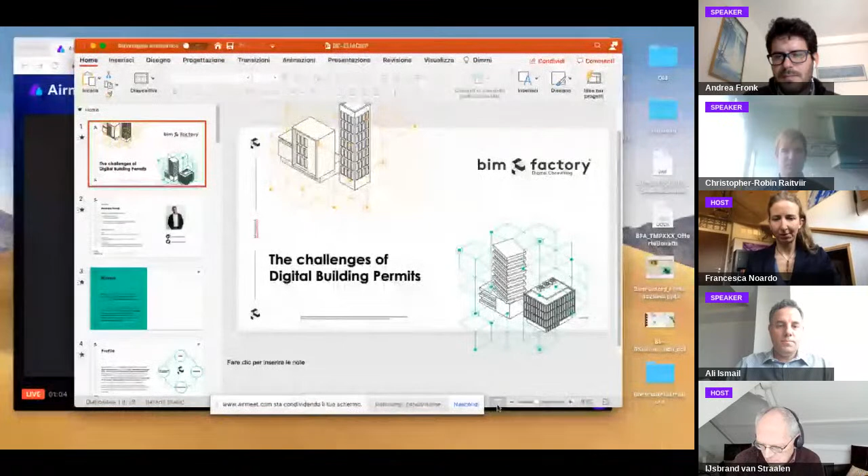It's a pleasure for me to be here because I think that when we talk about digitization, many times we are focusing on BIM, on digital twin, but I think that at the moment we need also to speak about traditional activities and traditional tasks that are daily activities for designers and municipalities.

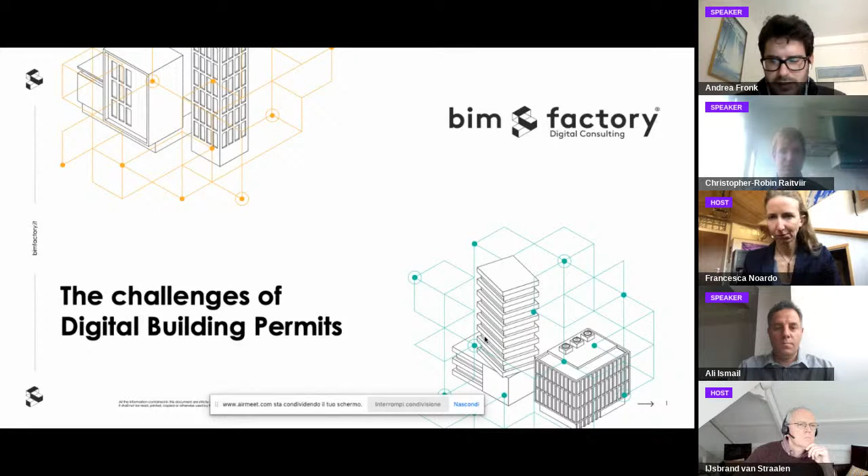So shortly, I'm going to present myself. An engineer, and I'm the director of Bim Factory. I worked in 2014 at Fraunhofer Institute in the post-construction engineering research team with an application of lean construction and last planner system. Then, since 2015 to 2019, I worked as a BIM coordinator and then partner for Division Architecture, which is a design firm located in Brescia in Italy. And then, since last year, I worked as a director for Bim Factory.

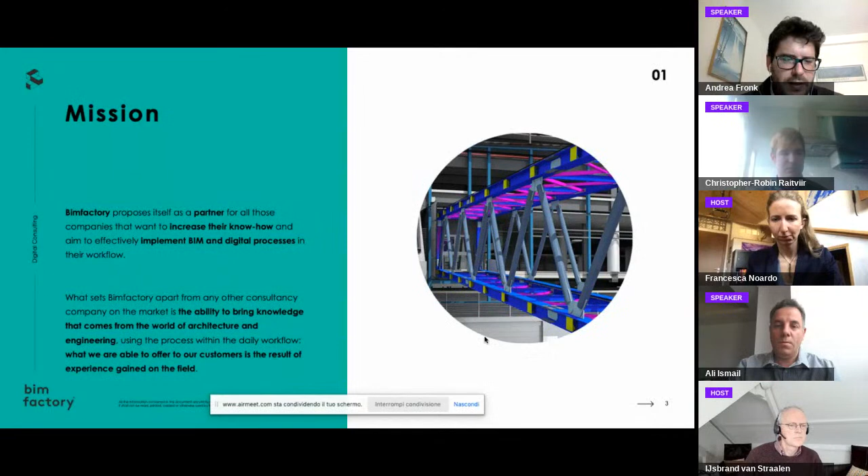If you want to follow me, I'll leave my social network links. Who is Bim Factory? It's a consultancy firm working on the implementation of digitization in the construction sector. We are all technicians, we are architects, engineers, and we had the opportunity in the last 5-10 years to implement BIM and digitization in many projects, and we had the opportunity to have feedback by many stakeholders in the supply chain, and so we decided to offer to our customers the result of our experience gained on the field.

Our target is to support every kind of stakeholders involved in the supply chain. Clients, for example, many times are investors, but also public administrations. We support designers. We have a lot of experiences with constructors, both general constructors of traditional companies, and of course asset and facility managers, which many times are working together with the clients.

Shortly the history, Bim Factory was founded in 2015 as an operative brand on Division Architecture, but since 2019, thanks to the participation of Progetto CMR, another design firm located in Milan, Bim Factory has become a consultancy company with international scope.

Now, let's talk about the agenda of this speech. We start with the state of art, particularly in Italy. Then I will talk about the critical topics about building permits. One of the most important topics, which is documentation versus model. And last but not least, the validation of data.

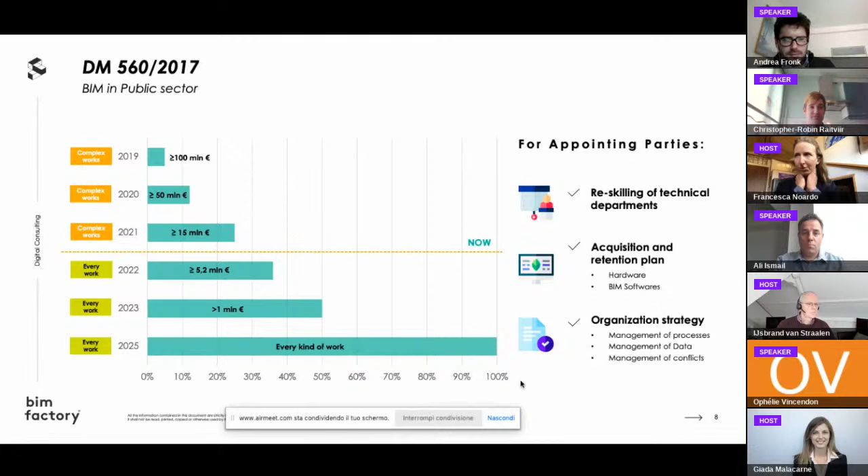Other important aspects about the implementation of digitization are related to the reskilling of technical departments, of course, the acquisition and retention plan for hardware and BIM software, and the organization strategy about management of processes, data, and conflicts.

Of course, we have also technical rules. We have the ISO 19650 about the vision of the strategy about BIM, but we have to say that Italy was one of the first countries having the national annex of ISO, which is UNI 11337. And they are related on different levels because the UNI is focused on the technical parts of digitization, for example, guidelines for employer information requirements, level of development for the national requirements, and so on.

And of course, we have an ecosystem of rules in Italy, comprehending the ISO for IFC standard, for information delivery manual, and structure for classification. So we can say that Italy has all the tools to apply BIM and digitization in these workflows, and maybe in the next year we will reach very important results.

Now I'm going to show you some numbers reached by source ANCI, National Association of Italian Municipalities. The interesting thing is that near to 50 million people in Italy are living in large municipalities, and only 10 million people are living in small municipalities. It means that most of the population is located in large cities, having of course some kind of goals, budgets, and targets. But the interesting thing is that 70% of municipalities are represented by small municipalities, having less than 5,000 people.

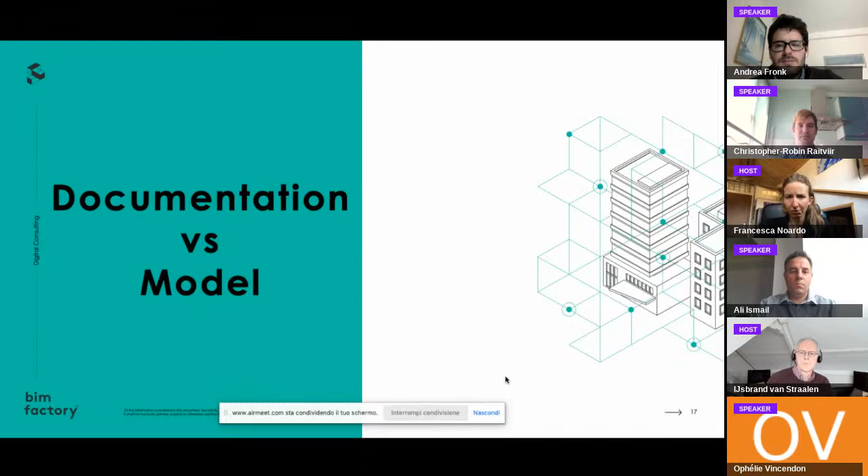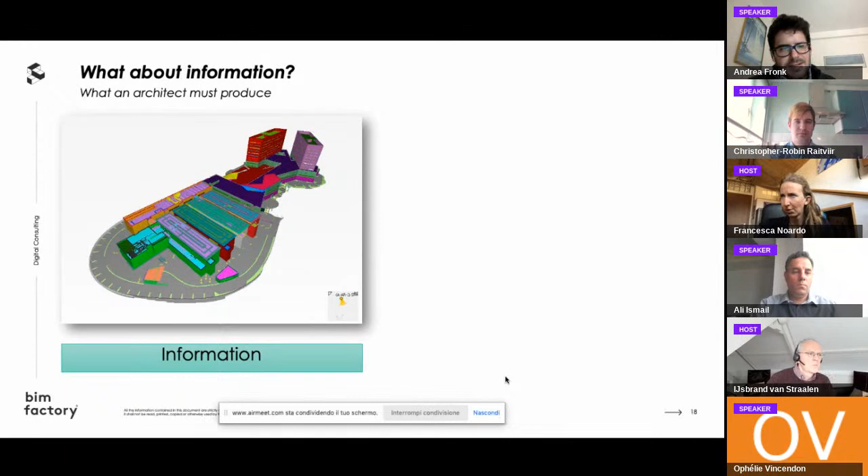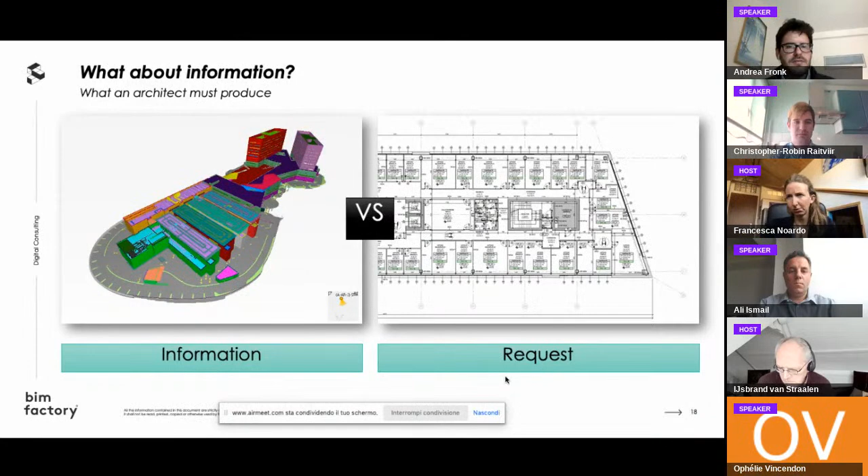Let's talk about documentation versus model. In Italy, digitization is already implemented by technicians. We met a lot of architects and engineers who have implemented BIM in their offices, and they spend a lot of time to create value, because what is a BIM model? It's a 3D geometry model, complete with all information needed for a particular scope or use. But the time and value spent on this work is not continuous with the submission of the building permit, because every time the request is to have 2D documentation. So this chain is blocked in the passage between the designer and the public administration, and many times the designers decide not to develop this kind of information, because they lose a lot of time and money.

As an example, last year we worked on a building permit for the University of Geneva, using a BIM model because it was a complex work over 100 million euros. We had something similar to 5D, a relationship between models and cost estimation. But the municipality wanted 3 printed copies of the cost estimation documents, so we spent a lot of time to print, submit, and control this documentation. We think nobody can be supported to validate a document having close to 1,000 pages. So we spend a lot of time not adding value to this process.

I think BIM models could be very helpful tools to structure data information, particularly for building permits. BIM models can grant the structurization of information for elements. We can introduce attributes and parameters for physical performances of elements, for example transmittance, fire rating, acoustic rating, and so on. But we can also introduce data information for spaces, which are very important and relevant for the building permit because of checks of minimal surfaces, minimal area, distances, and so on. So I think it could be helpful.

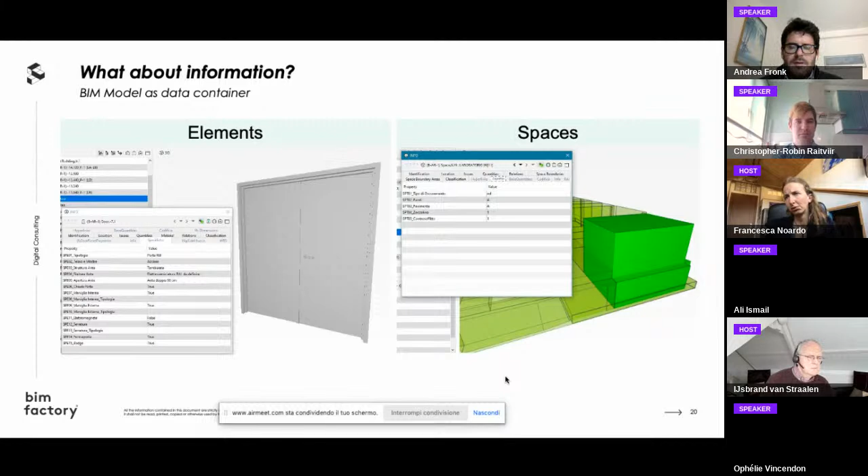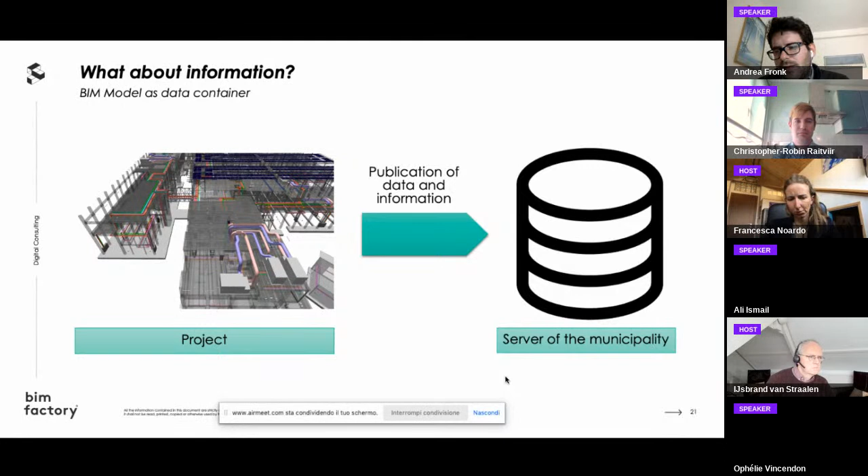Another aspect: if you submit the project, you don't submit only the geometries, but also the structured database of the project, which could be published on a server for the municipality and accessible by technicians who will work on this project in the future. So I think it's very important to optimize this kind of process and to find the return of investment of this activity.

Now let's talk about the validation of data. I think it could be an interesting example of the problem for the designer, that is the demonstration of the project, which is the process for the designer. He has to first find the requirements for the building permits, which can be in different documentation and different codes. He has to analyze the requirements, define the project, then represent the project in 2D and also demonstrate the project.

For example, on the left we can see the demonstration of the areas. Many times the check on the drawings is made physically. So as a designer, you must demonstrate the dimensions, the small areas that compose the larger areas, and so you spend a lot of time on this activity.

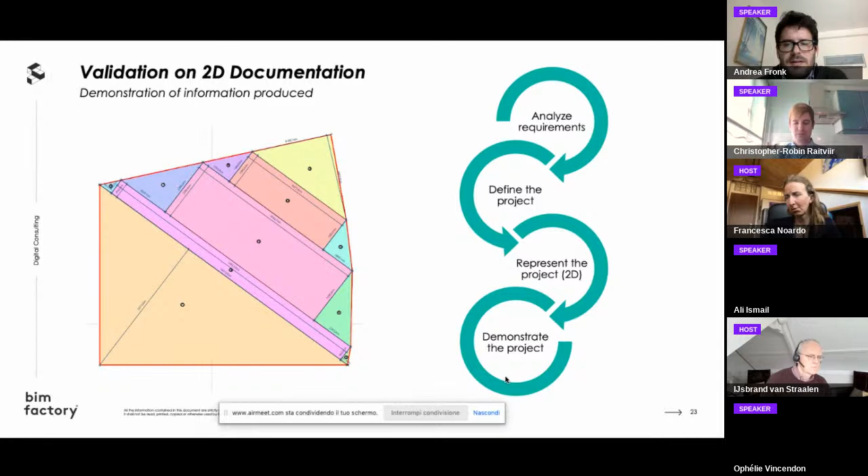Of course, if you have a BIM model, you can query the model. You can click on the objects and get answers about this kind of data—digital queries that can be done for performances, for volumes, and for surfaces. I think it could be an important opportunity to implement also the check of the data.

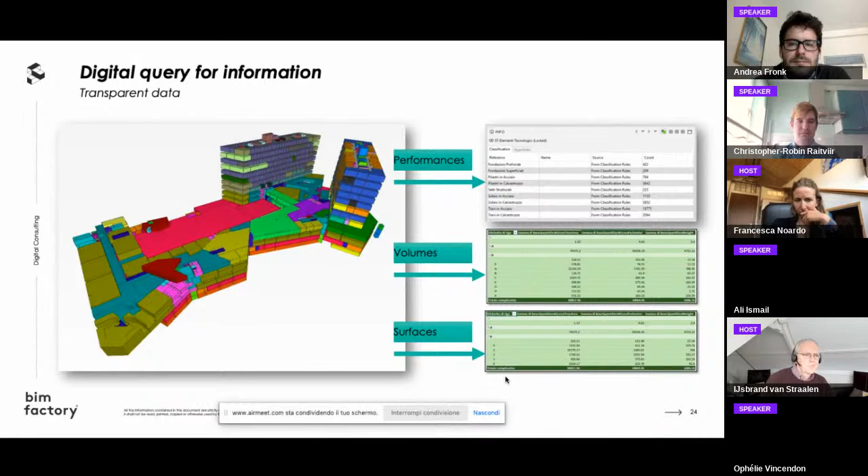Check of the data is composed of different steps: it could be model checking or code checking. When we talk about model checking, maybe it's more interesting for the project, for the designers. But also, in Italy we have a lot of historical buildings, and the public administration is always interested in possible clashes between expansion projects and existing buildings. So it could be helpful to have some rule sets and possibilities to automate this kind of control.

And of course, also code checking. When you validate a building permit, you have to validate data such as surfaces, areas, densities. This kind of information can be validated automatically with BIM tools or in other ways, but surely it could be automated by digital tools.

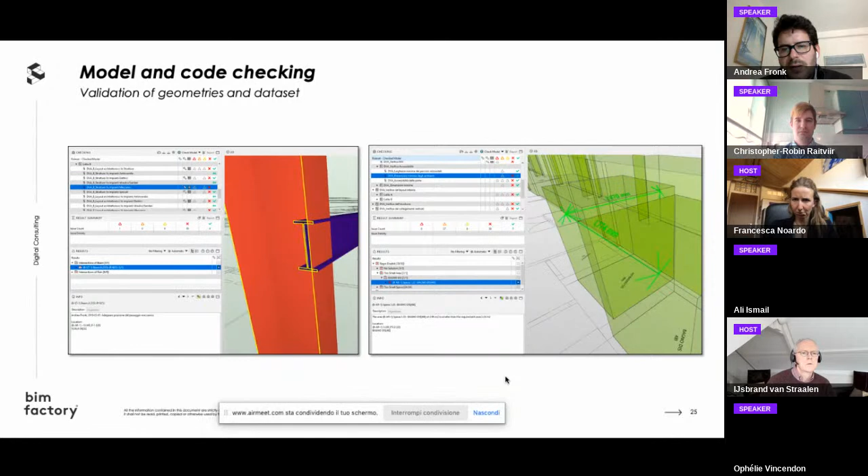To have an automated check, I think it could be very helpful to have also the digitization of information requirements, because many times the information requirements are not quantitative, but qualitative. I think we must have a more computational approach to give the information requirements. It could be very helpful to have rules for automatic calculation of areas, volumes, and surfaces. For the designer, it's very interesting to have a data set for technical codes. In this way, the designers and the public administration can speak the same language, and also have specific data sets for element performances. So if the designer has the information requirements, he can monitor these requirements during the project, and maybe spend less time and less money in the phase of dialogue with the public administration during the submission.

And last but not least, we are talking about public administration, and so we must spend some words about open standards and open formats. At the moment, the most important open standard for digitization in the construction sector is IFC. In Italy, we have to spend a lot of time promoting the culture of open format, because many times public administration is focused on the problem of the tool and not on the problem of the data. And so I think that IFC could be a very helpful tool.

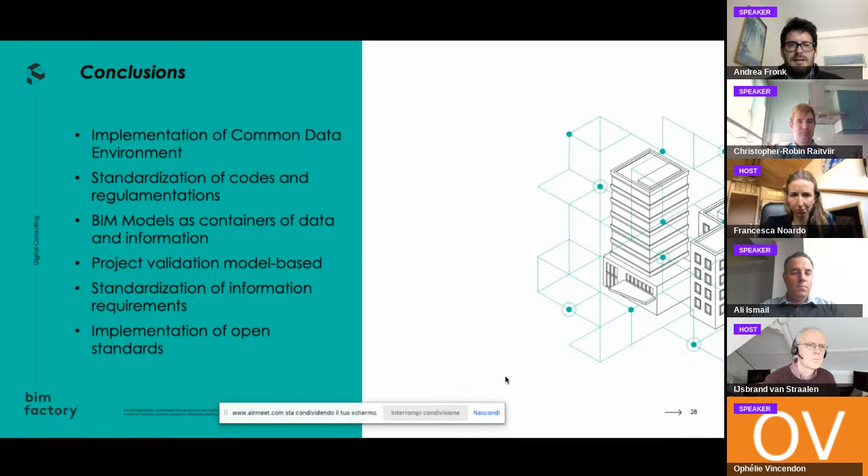For me, that's all, and I'm open for any questions.

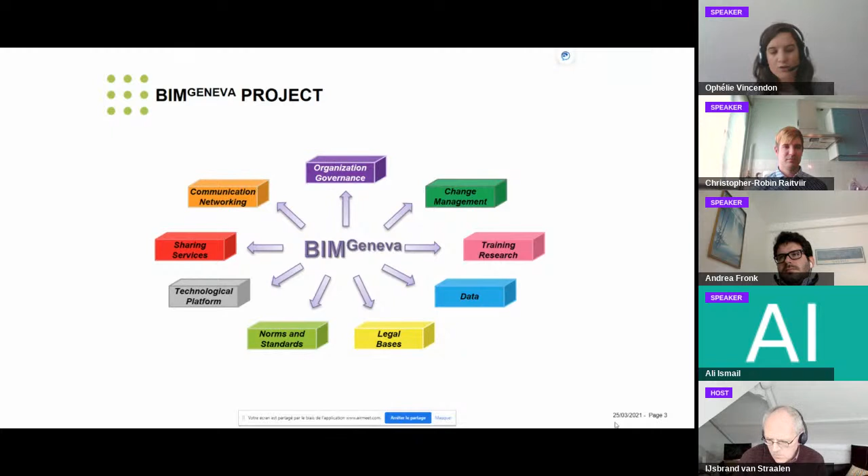So we have two projects inside one. The first is the BIM project, which is to develop BIM inside all the states, not only in the regulation authority, but also in build assets management and territory management. And the other project is to digitalize building permits.

The state of Geneva started two years ago a digital platform, ACDMAT, for digital building permits, and now delivers around 80% of the building permits in a complete digitalization way, based on 2D PDF and online forms. And we started to create a prototype for digital building permits based on a BIM model. So that's what I will present to you now.

The strategy for development of the BIM model building permits started with a reflection about the integration of BIM inside the building permit process. Then we defined all the requirements and all the different modules we needed. We are doing the structuration of the data we need for the BIM model inside the building permit, and we had a reflection about Geneva's regulation and how to translate it into digital rules. So we created a prototype, which I will show you after, and now we are integrating the prototype inside the whole system and inside ACDMAT.

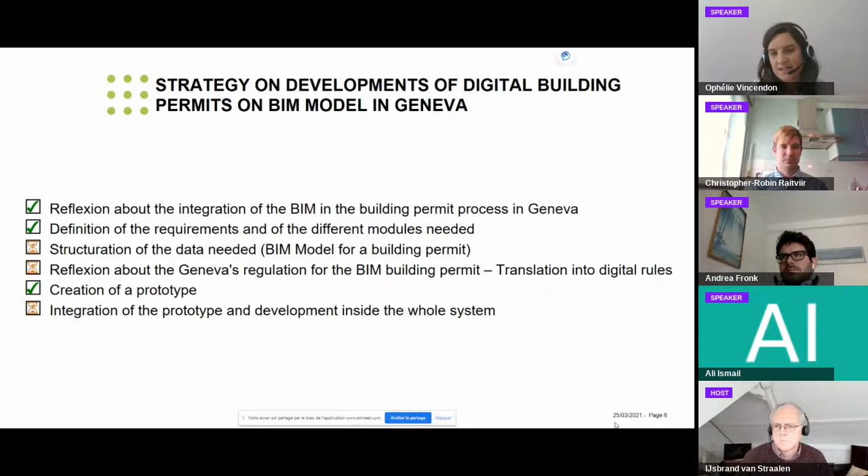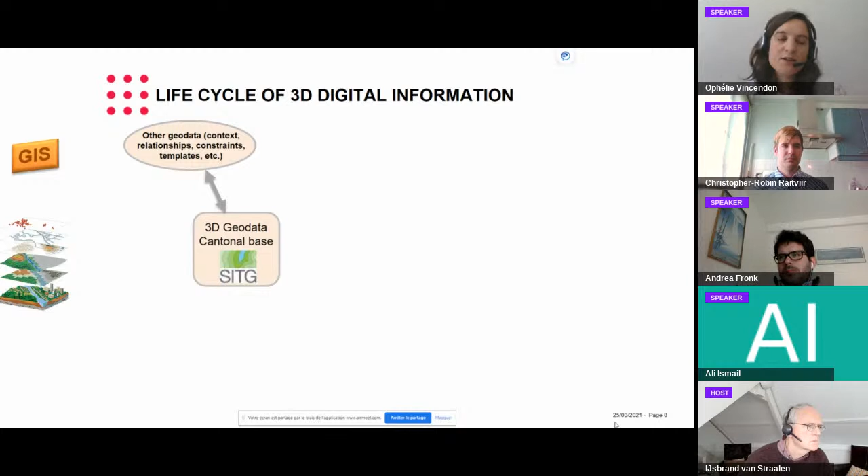We have a view about the life cycle of 3D digital information. We have a really huge geodatabase, the SITG, which is in the GIS way. So the goal is to extract some of this GIS data for the area around the project, and to do it in the BIM way, so we can use all the use cases in BIM, and after the project evolves in the BIM way.

And then we will integrate this data inside the geo database, the SITG, and use all the use cases in the GIS way.

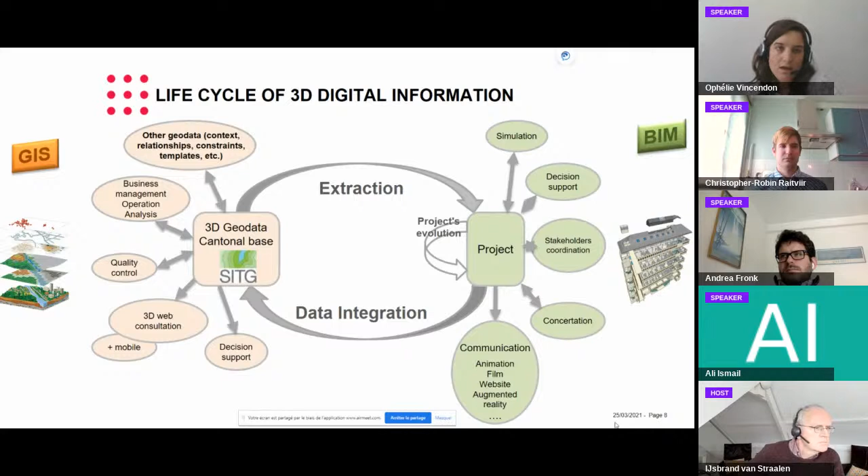I will not really explain all these steps, but that's all the steps for the digital building permits. I will show you for example a case where we concentrated our approach, and I will show which steps it will affect.

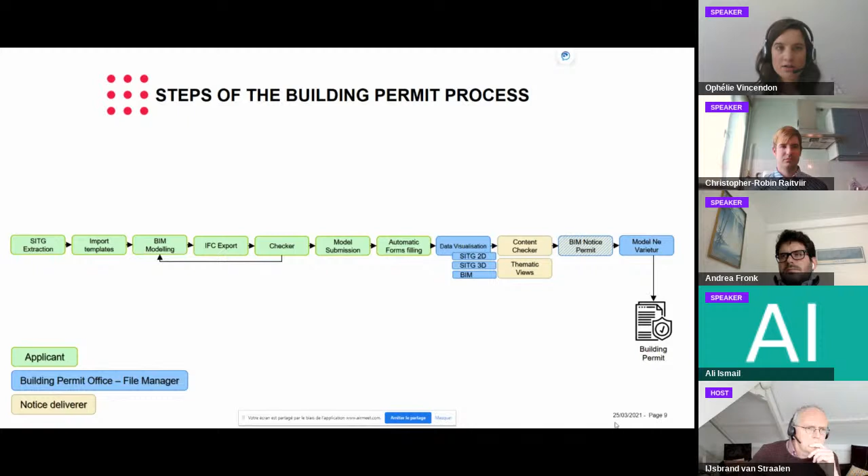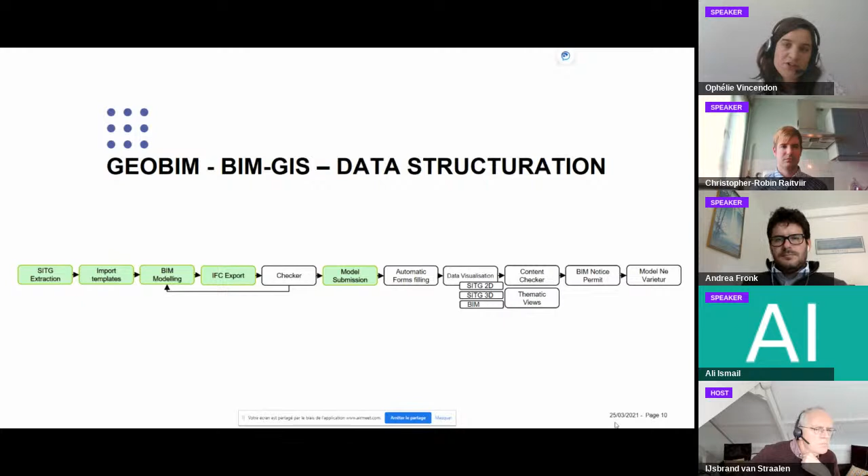So the first is GeoBIM, the conversion of BIM and GIS, and the structuration of the data. We are mapping all the GIS layers with BIM objects and parameters, and creating an IFC export from the GIS data. We are also structuring the BIM submission model, and creating templates and export templates, property templates with MVD, to structure correctly the submission model.

What we encountered is that GIS layers are structured differently than BIM objects, and we have to match layers with objects and layers with parameters, and we have 2D layers inside 3D objects. So it's complicated to see which one has to go in objects or parameters, and to translate all that. We have also problems with georeferencing, because all software are different with georeferencing, so it's really difficult. And also the importation of the IFC model inside modeling software.

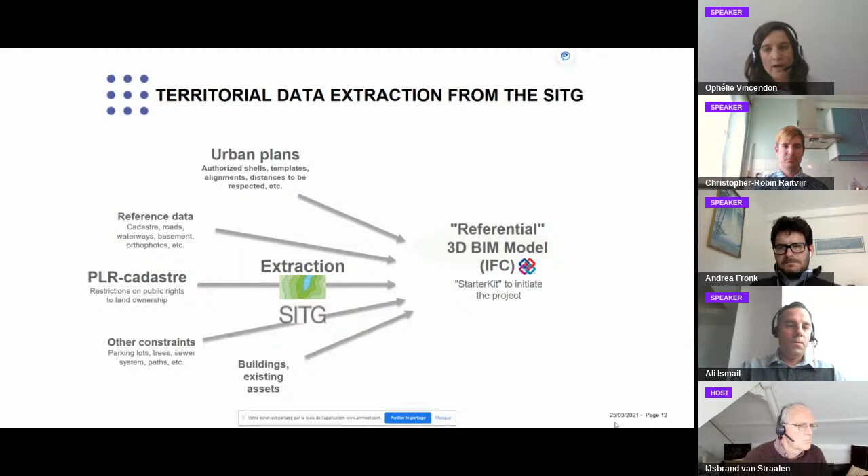So the goal is to extract all the urban plans, all the referential data, cadastral data, and so on, and to create an IFC model with all the referential data. That's what we extract from our database. It's an IFC with the correct structuration, the correct BIM objects with IFC BIM classes, and we have the upper ground and the underground with all the canalization and so on.

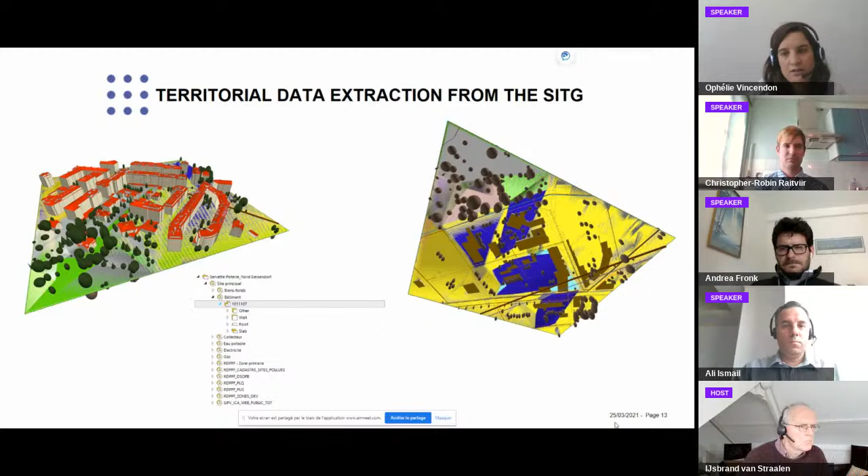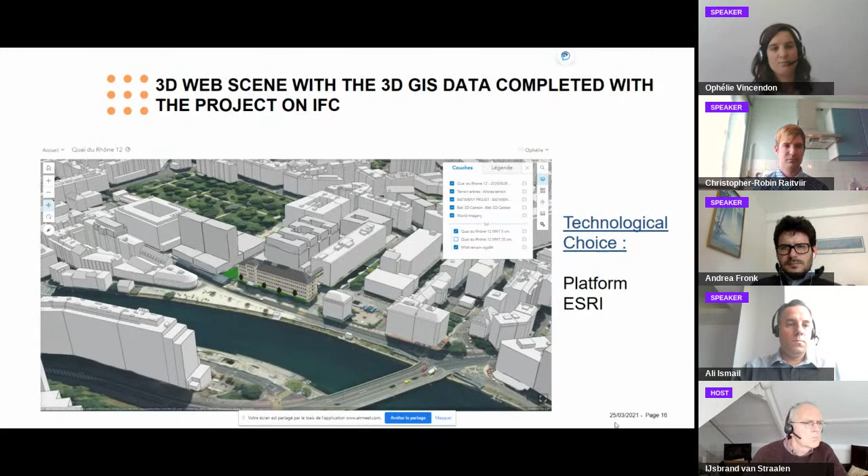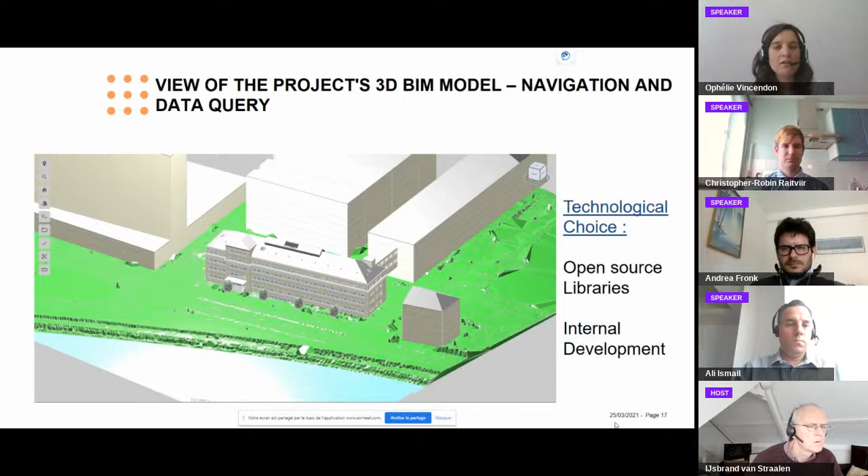What we encountered is also the georeferencing for the 3D GIS website, and problems with territorial objects in IFC. So what we have is the integration of the IFC inside the whole canton. For the SIG we are using ESRI technology, also for the GIS part. For the BIM part, the BIM viewer, we use only open source libraries, and we made our own development.

And so we created some rules to see the project with a professional angle, for all the professionals inside the state. They are seeing some aspects from the model for the building permits. So we were using some thematic views to do that.

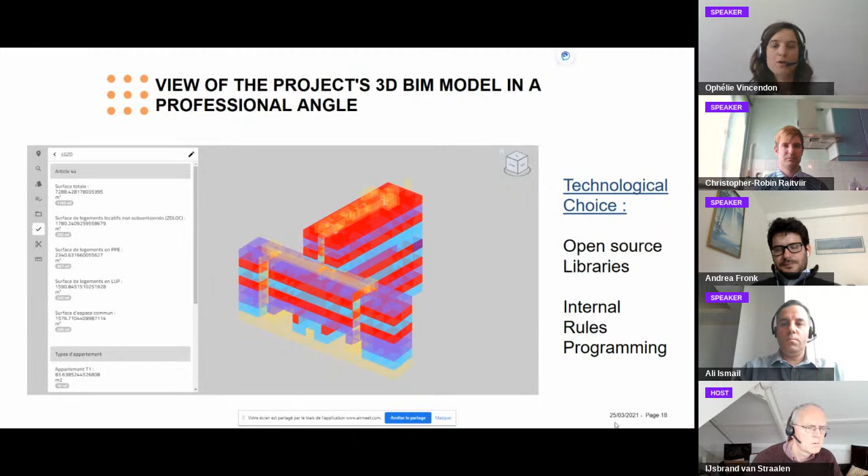The other part is the data checking, so we developed our own checker also. The first step was to identify the regulations which are translatable into programmable rules, also the structuration of the BIM submission model to do that. We are currently implementing some rule sets for the structuration of the data, the completeness and structuration of the BIM submission model, and also for some construction regulations.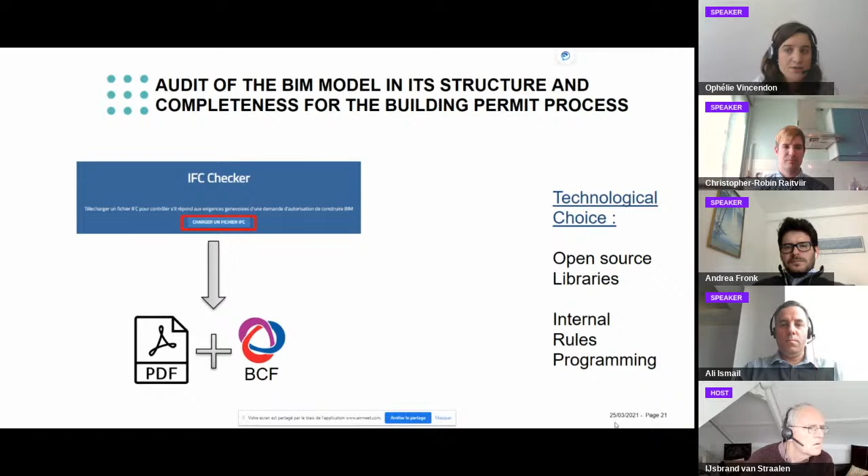The problem is that the regulation is not thought through a 3D model, and we have some difficulties translating it into programmable rules, so we are currently analyzing that. What we want is to have a checker online for testing during the creation of the model, for professionals to test during model creation whether the structuration of the data fits the rules for the digital building permit in Geneva. To do that, we use open source libraries, and we program that in our own way.

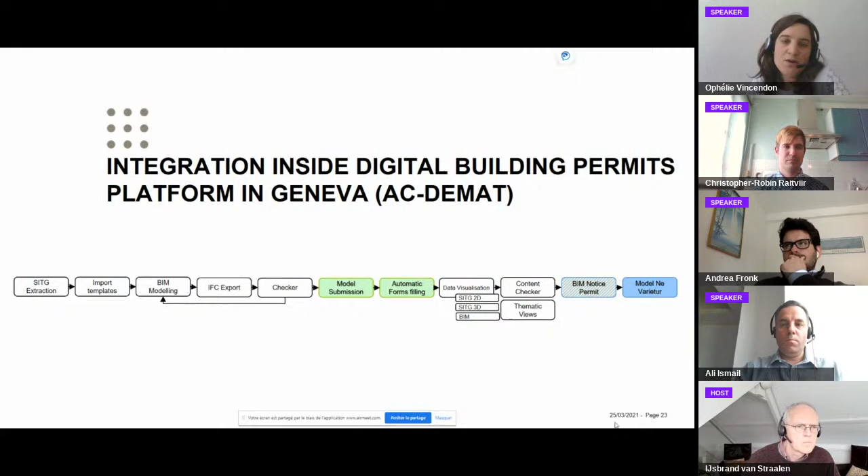We use the RASE methodology to translate the construction rules. The other part is to integrate everything inside the whole system, the building permits platform, AC-DEMAT. So what we are doing is connecting all the modules, the viewer, the checker, and all the other modules, to the platform used to deposit a project. We are also doing the filling of forms automatically for the building permit.

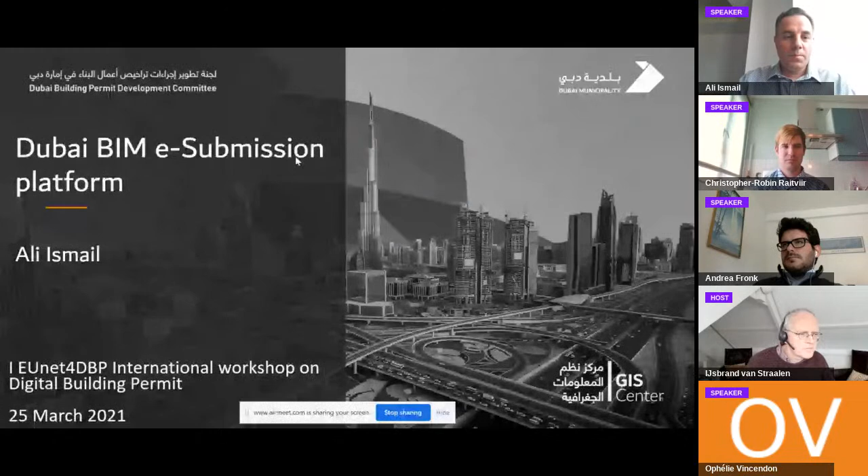First of all, I will give some information about Dubai Municipality and the GIS Center where I work. The Dubai Municipality is one of the largest government institutes in the United Arab Emirates, and it is one of the leading institutes in terms of providing smart projects and smart services. The vision of Dubai Municipality is developing a happy and sustainable city, and over time Dubai Municipality has grown up to 34 departments with more than 125 sections and almost 11,000 employees and workers.

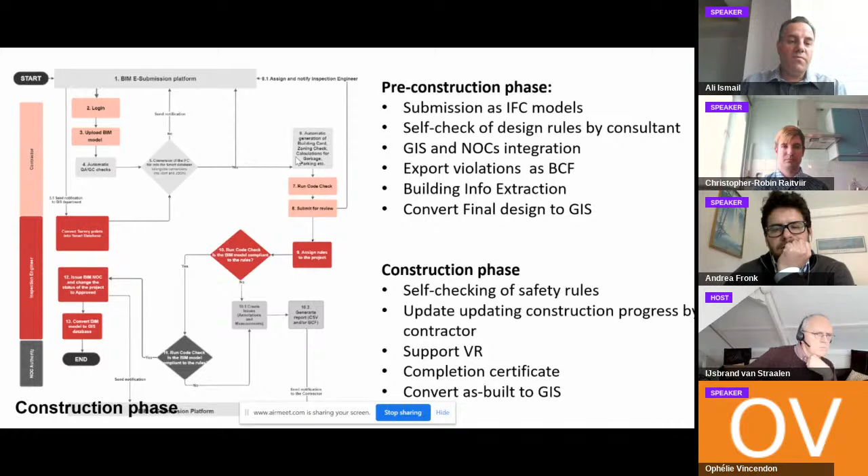If the contractor provides an as-built model, in case there are changes in the design model, we can have the second kind of BIM to GIS integration and convert the as-built model to GIS. So this is briefly a simplified workflow for these two phases.

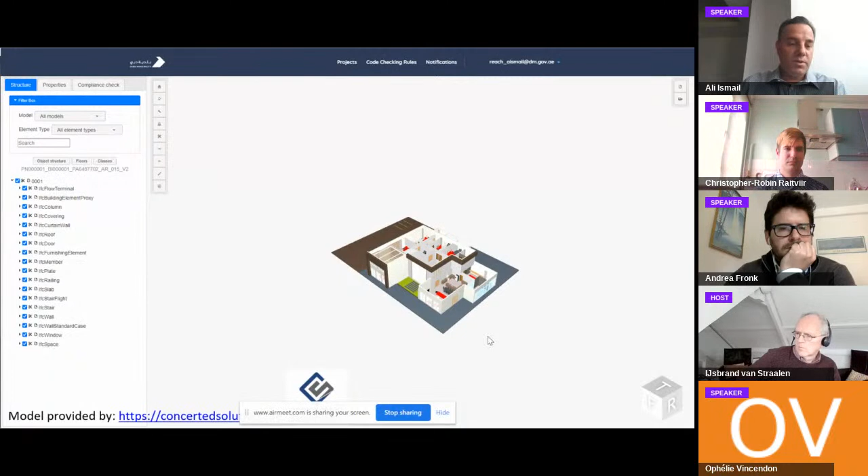This is a standard example of a real villa here in Emirates, provided by Concerted Solutions Company - thanks to them. Here we see, for example, the online viewer with a lot of options for filtering, extracting information, inquiring information, and so on.

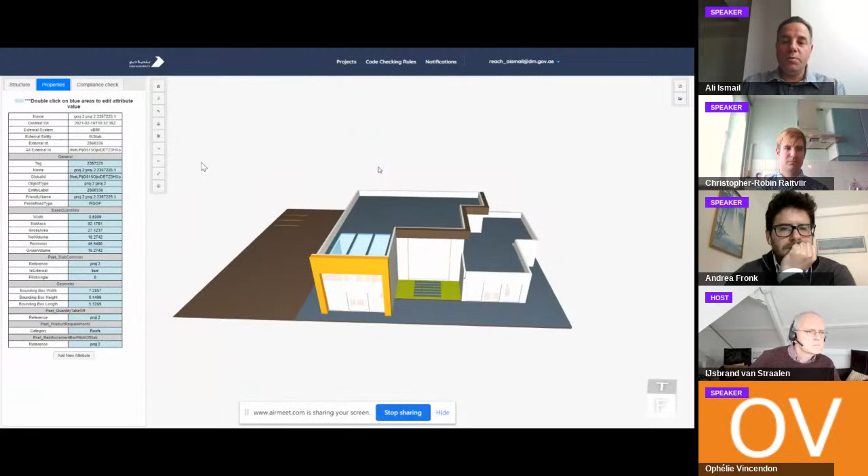As a villa, there is this tab, compliance check, where the user clicks and selects which rules he would like to check. Then he gets automatically a report for the violations or for the elements which satisfy these rules. Here we have an example: checking the maximum allowed height for the riser of a stair.

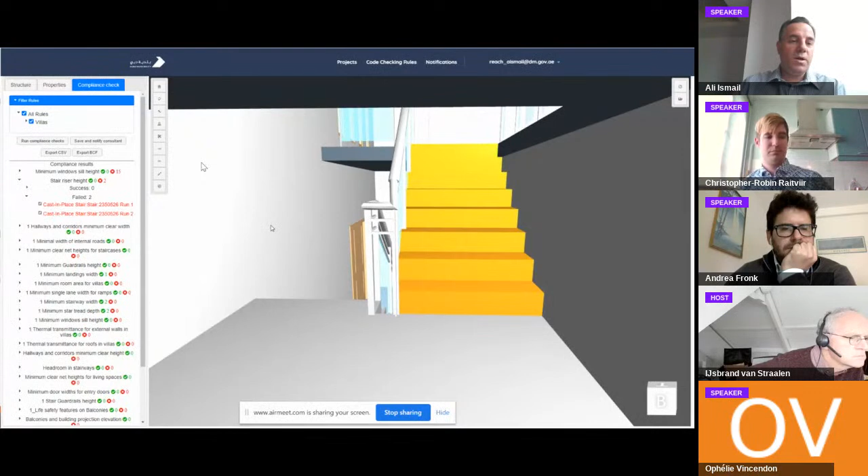After checking these rules, the user can export this result in different formats, and one of them is the BIM Collaboration Format, as I already mentioned. Here we see, for example, by the rule name, to avoid having duplication in the issues, and we have the internal IDs of the model.

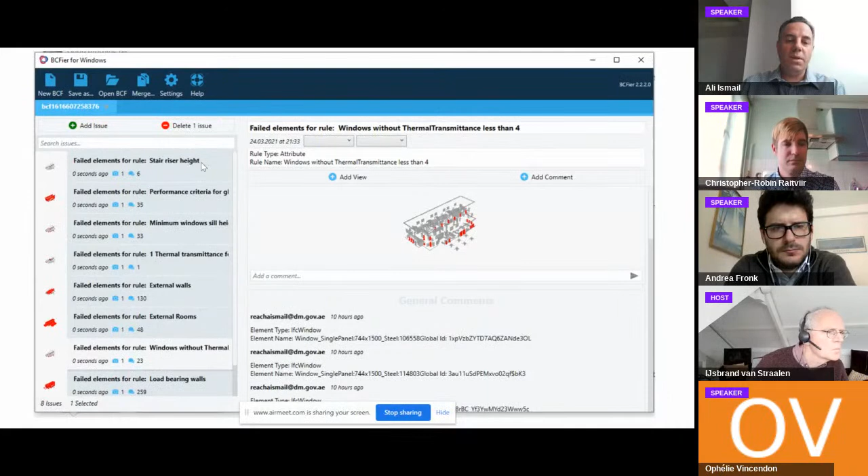So in this case, the consultant can go back to the BIM design team and ask them to solve this problem, or to clarify it with the building permit authorities and resubmit the model again.

We are also adopting BIM Collaboration Format not only for the automated code checking and this auto-generated report, but also at any stage the internal staff of the building permit authorities can create issues and assign them to users like the designers, the contractor, subcontractor, etc.

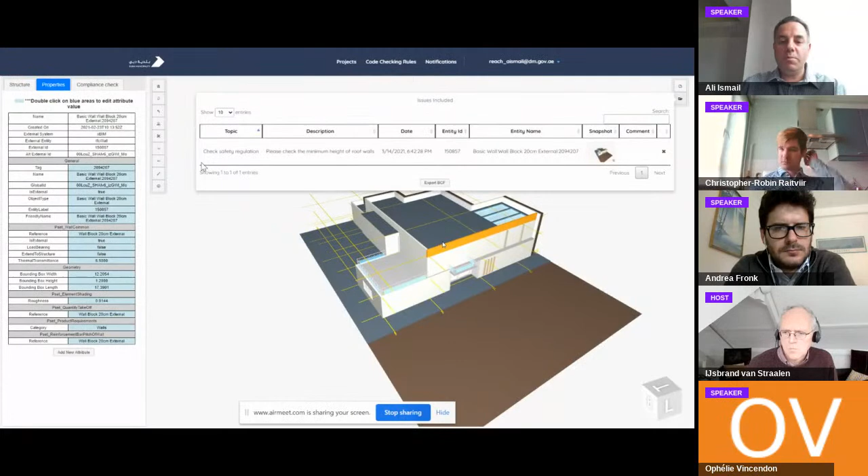This issue management module will help have a very nice way to collaborate, not only through normal communication, but here you can always have the same view of the issue, and you can make a measurement and dimension or add some annotation. So we are trying here to implement the full standard of BIM Collaboration Format to the ultimate level.

This is an example of the database of the rules. As we see here, we are adopting Dubai Building Code, which is the new code, the output of one of these projects for the committee, which harmonizes and updates all existing codes among all building permit authorities.

We have almost 800 pages of new code, and it's a little bit complex to analyze everything, but we are doing our best to maximize the number of rules which can be automated by the end of the project.

And the platform has an open structure, so we are not working with any commercial software or black boxes. We believe that with some training and experience, IT people or engineers with an IT background can even write rules themselves and extend the database.

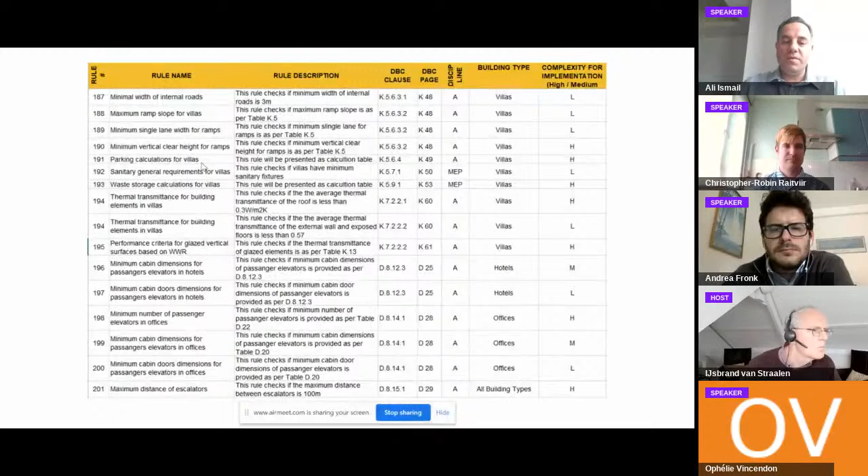In the scope of this project, we are working with almost 200 different rules, all of them extracted from the Dubai Building Code. And for the data requirements for the BIM model, as in another presentation we heard, this is a very difficult task. Our approach is to look for the standardized property sets from buildingSMART.

If we don't find them, or if there are some local conditions where we need to add further attributes or further property sets, we define them. For every property set, we have a kind of modeling strategy which limits, so to say, the freedom of modeling, just to make sure that the end user will follow this standard to have good quality models.

For some technical information about the rules, at the moment we are supporting four kinds of rules. The first one, the simplest, is the attribute rule, where we look for a combination of criteria based on alphanumeric or semantic information. It works under the concept of filtering elements according to the class or classification, and then we check some property sets and property single values to determine if the rule is satisfied or not.

The second kind of rule is the ratio rule. In some cases we need, for example, to check the ratio of window area compared to the area of the space, etc. So we created this ratio rule.

The third one, which is a little bit complex, is the geometry rule. I should say here that we are converting the BIM models internally to a geospatial database in the background, so we can also run queries related to the location, distance, and size of elements. With this rule we can, for example, compare the distance between a room or office and the emergency exit door, or do a simple clash detection, or check the clear height of a stair or corridor, etc.

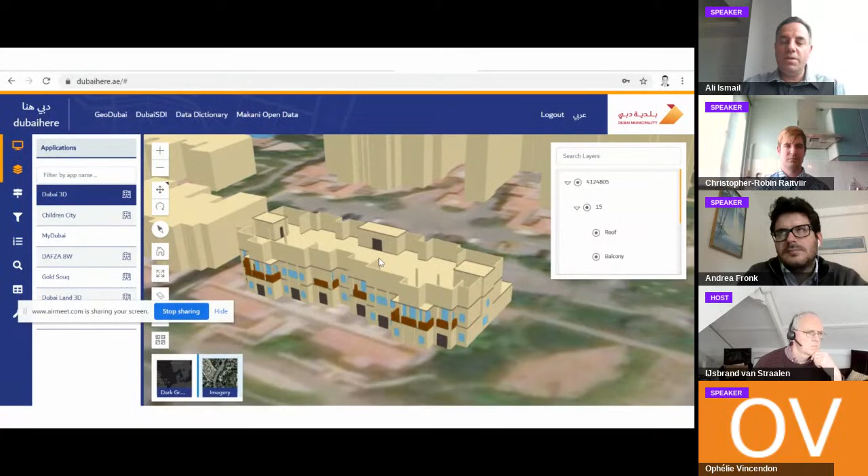Here we see an example of a building converted using the same GIS model I was talking about. The advantage here is that we can convert the model from CAD and from BIM at the same time, and the result is the same. I believe this building was converted from a CAD drawing, while the one on the previous slide was converted from the BIM model.

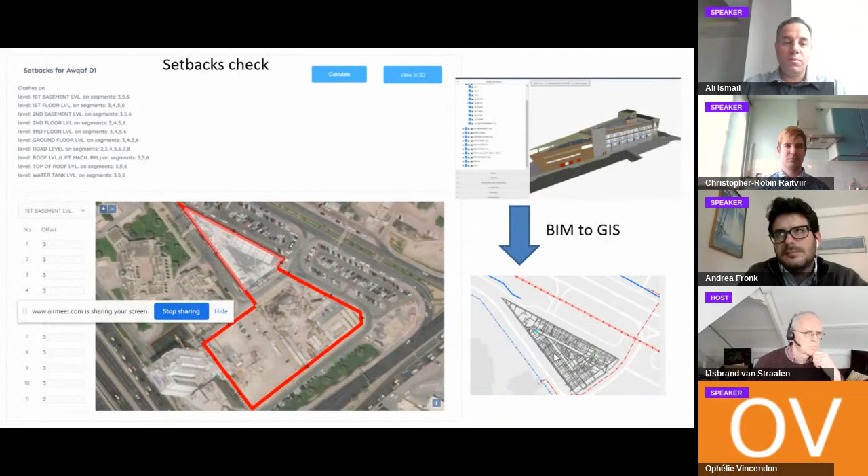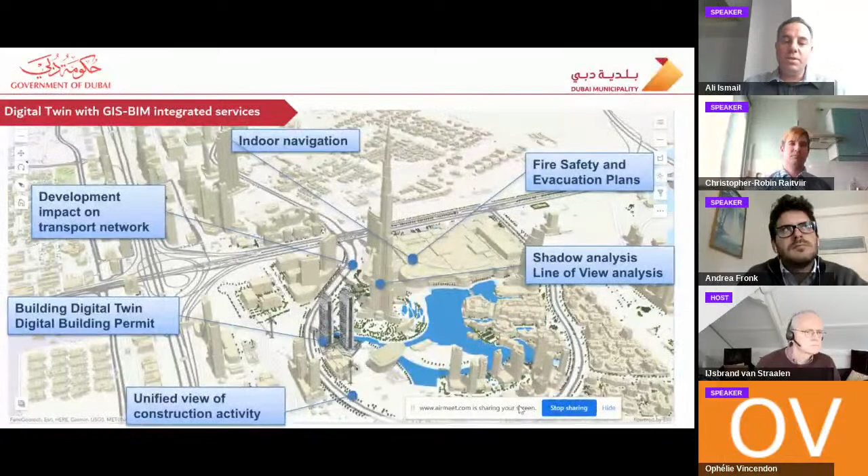So at the end, as I mentioned, as a GIS Center we have a vision to build the digital twin and to have GIS and BIM integrated services. This will help us provide a lot of smart services for government authorities, and also support the building digital twin and digital building permit, giving the consultant from the beginning a lot of options to use GIS data when starting, for example, the primary design of a model - to do things like shadow analysis or line of view analysis - and to provide other government entities and the public sector with this building data inside the GIS context. So this is mainly our vision in GIS Center.

So with this, I finish my presentation. If we have time, I can make a quick demo of the platform, or at least show it in action, not only as a picture. Okay, so I don't know how many minutes we have, or if we already have questions.

Ali, we already ran out of time almost. I think we can go to the questions. Are there questions? I have one question.

Very interesting what you showed us, Ali. Which parties are using this tool, or are you expecting that they will use the tool?

Sorry, I didn't hear the first part of the question. Now, which parties are using this tool? This tool, as I mentioned, is developed for all the building permit authorities in Dubai - Dubai Municipality, Dubai DDA, and Trakhees, these are the three biggest - and it will be made available for all other building permit authorities. And when we reach the stage that the platform is ready for use and we issue a BIM mandate, it will actually be used by all consultants and contractors in Dubai.

And at the same time, as I mentioned, there is integration with other government authorities like Civil Defense, Dubai Land Department, and so on. So we also have the NOC authorities included in the platform.

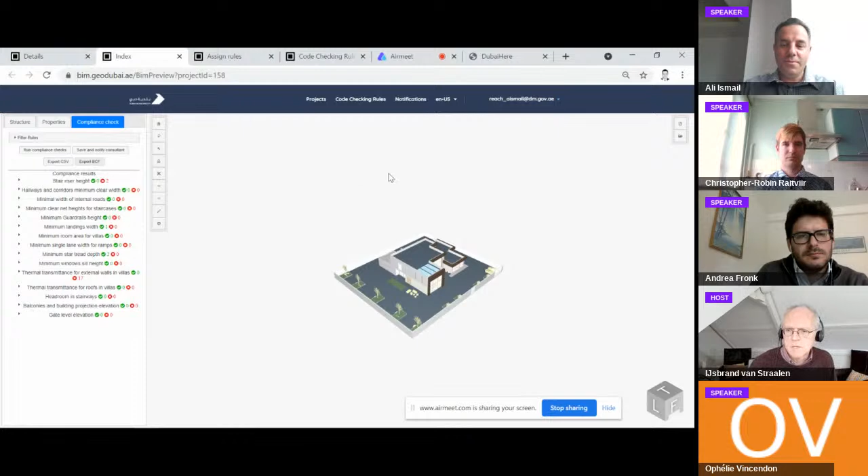Okay, Ali Ismail, thank you very much for your presentation. And I want to continue with the last speaker this morning. Thank you very much - and that is Christopher-Robin Raitviir from Estonia.

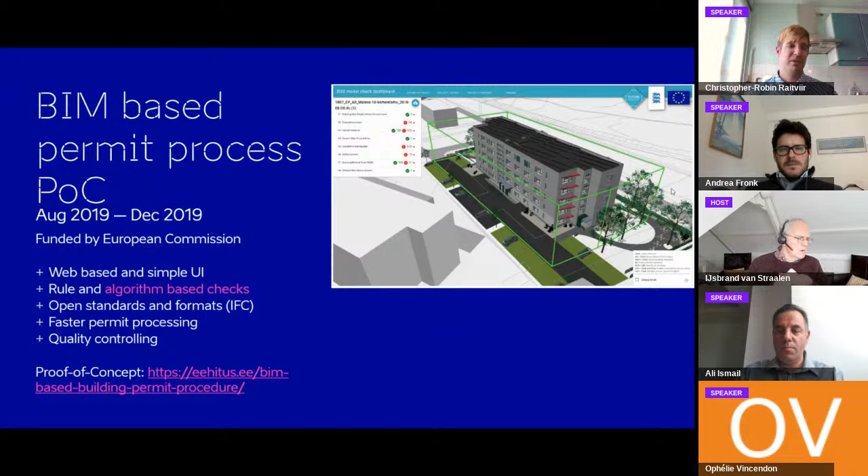We had a proof of concept, a prototype for the BIM-based permit process, done already in 2019, funded by the European Commission. As you can see in one of the screenshots here from that proof of concept, the main things were that it would be web-based, must have a simple user interface, there should be rule-based and algorithm-based checks, it must be on open standards and formats - we are doing IFC - and it must enable faster permit processing and quality controlling.

During the proof of concept, we tried to analyze and implement 9 different checks. Some of them would be rule-based, like height of the building or facade finishing material or minimum width of the doors, which would be simpler checks, but also some algorithm-based, more difficult checks, for example the existence of needed safety barriers and length of evacuation routes.

The process flowchart during the proof of concept, and also during this phase, is that the applicant would upload the BIM model into the building registry. Then it goes into the BIM storage. It will be checked if it is a valid IFC. If it is valid IFC, then there are BIM model checks, BIM area checks, and then it is verified. If there are a lot of errors, the applicant can revise their model and start again with the submission process.

If the applicant sees that there are enough successes, and for all the warnings they can give a good valid reason, they can submit the application and it goes to the permit processor, where they can inspect the results of these automated checks and do some additional manual visual checks, and either approve or reject the application, and by approving, issue a building permit.

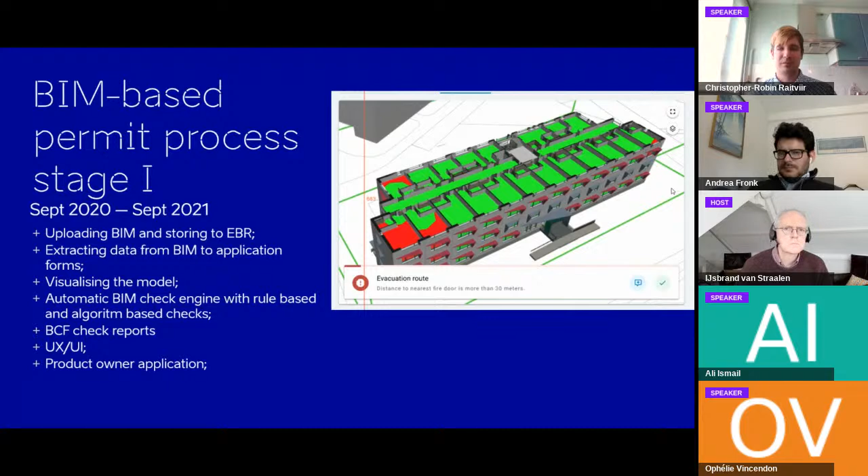These are some screenshots from the mockups, because we are developing the software and we don't have it running already, but it's in progress.

As you can see here is the BIM viewer. At the moment this is just a screenshot from the digital twin, but in idea, there would be the building that will be getting the building permit, here it would be the uploaded BIM model, and the surrounding area would be taken from the digital twin. For that process to happen correctly, the BIM model submitted must have correct georeference according to the Estonian reference system.

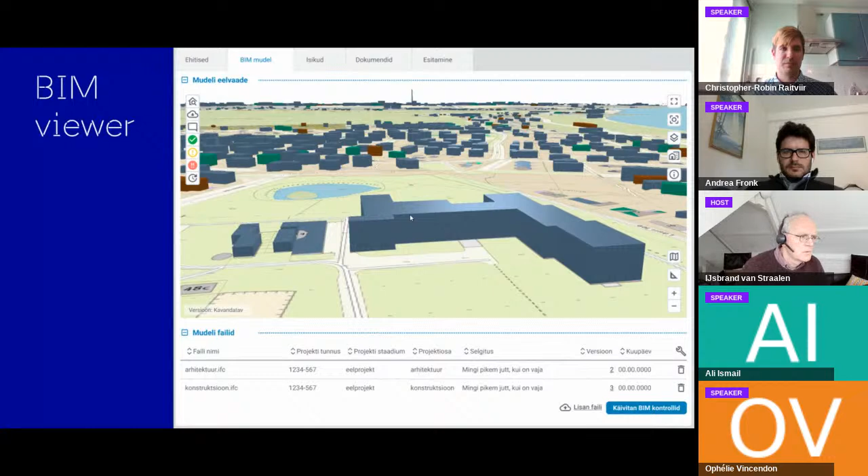There is also a possibility for discipline selection so that the applicant or the permit issuer can see only relevant information. They can turn off or on the different disciplines like architecture, construction, HVAC, electrical, plumbing, and so on. In addition, there is also a possibility of floor selection so you can turn on and off different floors to better visualize the information needed at the moment. And also all the functions common to modern BIM viewers, so you can rotate, zoom in, zoom out, and see it how you like.

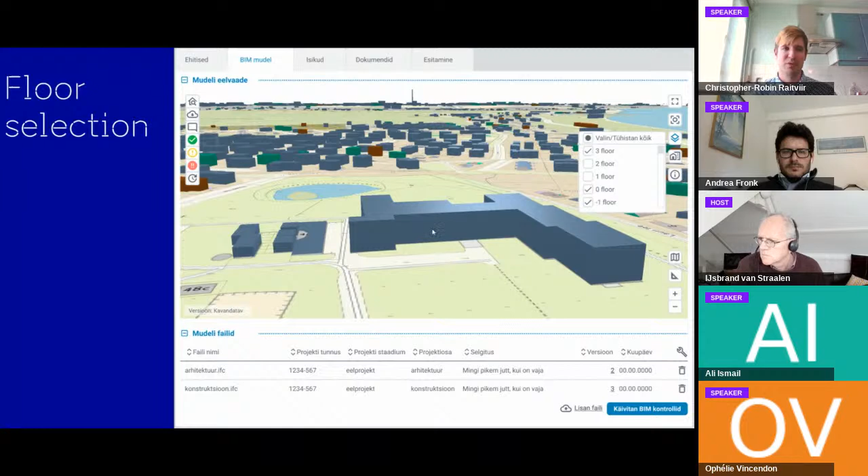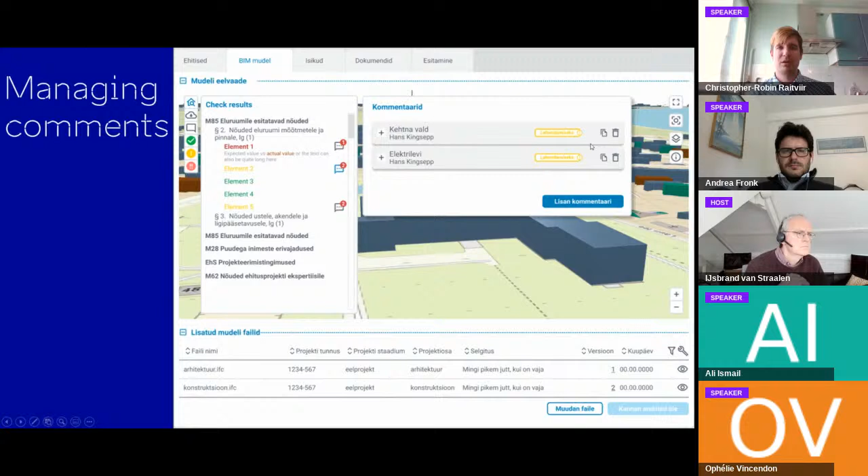For the permit issuer, it is also important to add remarks or comments to the checks. So if they see that a warning is relevant and needs to be fixed, they can add a comment, define its purpose, whether it needs fixing or not, and give additional information. Also, the main permit issuer can manage the comments added by different departments, so they can decide whether to address a comment from, for example, an electrical company, to the applicant, or decide it is not relevant to this permit issuing process.

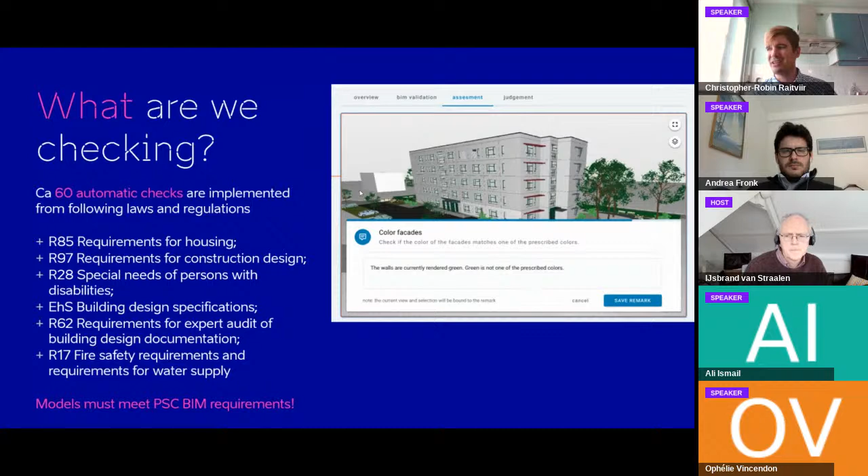And what is extremely important when implementing these checks is that all submitted models must meet the public sector client BIM requirements, so that data presented in the IFC format must be standardized.

For the public sector client BIM requirements, we had stage 1 already in 2019, to consolidate the knowledge of the leading BIM organizations into unified BIM requirements and make it one central document. It is also a common guide for both buildings and infrastructure, and an input to the preparation of future standards.

For the second stage of the public sector client BIM requirements, which we finished in December 2020, the main goal was to verify the public sector client guide and upgrade its feasibility, also detailed testing of the data content tables by creating a template model and validating this model against these data content tables.

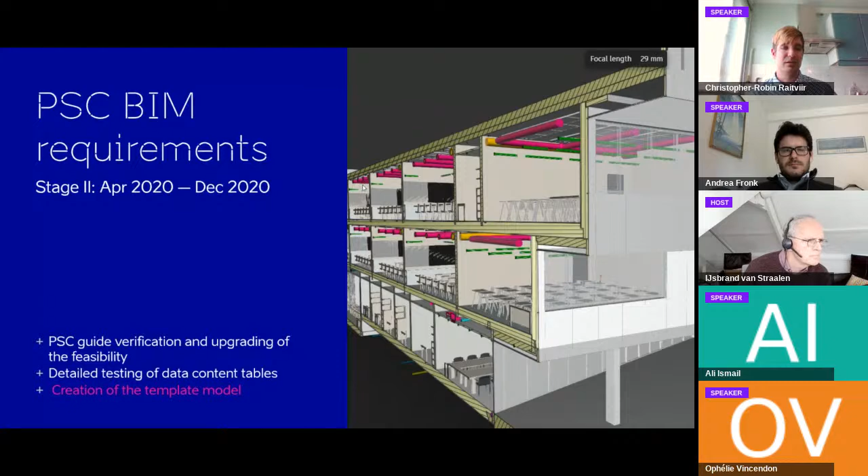Public sector client BIM data content tables are basically user-defined property sets. There are 51 different tables in Excel format for all necessary disciplines like architecture, structure, HVAC, plumbing, and electrical. This is just one example of this property set.

This is architectural floor covering. There are attributes, IFC property set, IFC reference, the data type, the example, and also the project stages it must be presented at - for example, the sketch, preliminary project, the main project, the technical design, and as-built model - and also an explanation.